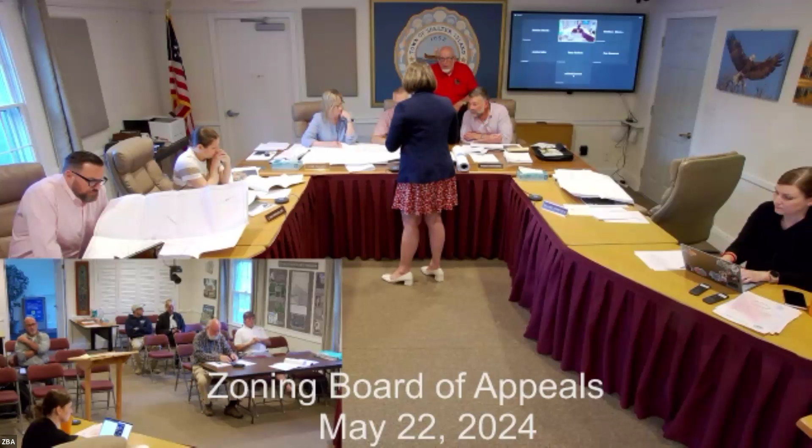There's nothing on the outside of the house right there, everything's outside of the building. So the only thing you're here for a variance from the ZBA, and a special permit I guess, is just this. None of the other things you want to do are in the setback at all. That's right. Everything else conforms to zoning and just requires a wetland permit, that's their thing. It doesn't need a dimensional setback relief from you.

We tried to limit the request for variances, we tried to avoid actually coming to the board. We thought we did, but we were in error because we thought this was a side yard. So we thought we were meeting the setback, but we found out we were incorrect. All right, thank you.

I'm sorry, can you just clarify again that shower, because I'm looking at all these plans, unless I'm looking at the wrong thing, please let me know. But the mudroom addition still shows a shower here. Can you clarify this for me? Is the mudroom addition going to have a shower in it?

State your name. My name's Kimberly, contractor on the job. The shower that's existing there is gone. There won't be any outdoor shower on that addition. The addition is extended to the corner of the existing building.

Okay, so these are not accurate then. I see it here, proposed mudroom with the shower here, and then it's also on this plan as well. No, that's gone, this continues to the end. There is no shower there.

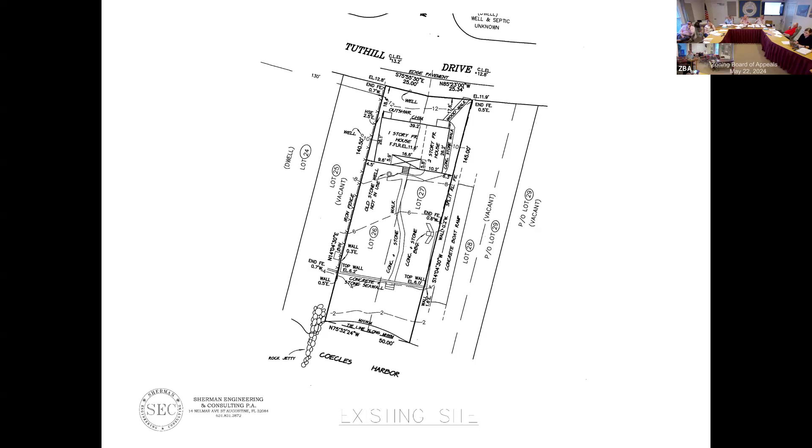The property is on Tuthill Drive to the north, Coecles Harbor to the south. This is the existing site, a 50-foot wide piece of property. It's in A zone, so you've got a 40-foot front yard setback and 25-foot side yard setbacks, meaning basically there's zero building envelope on this piece of property. I want to zoom in and point something out here: the flood zone on this property, where you go from a hazard zone, is along this AE10 line. Everything landward of that is outside of a hazard zone, and everything seaward of that is within it. So the existing and proposed buildings are not in a hazard zone.

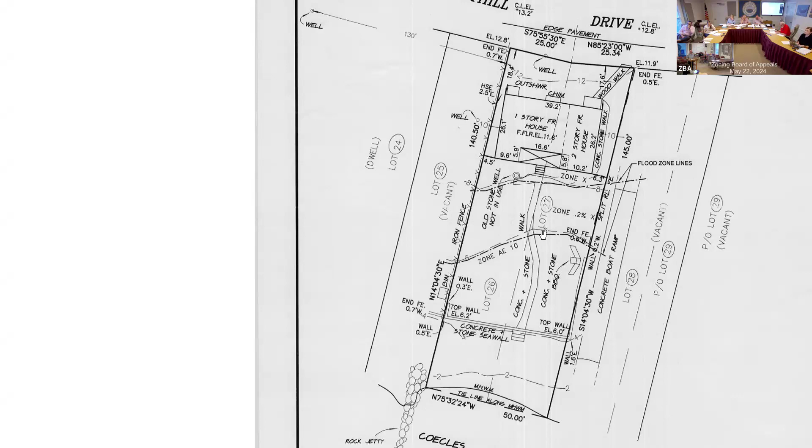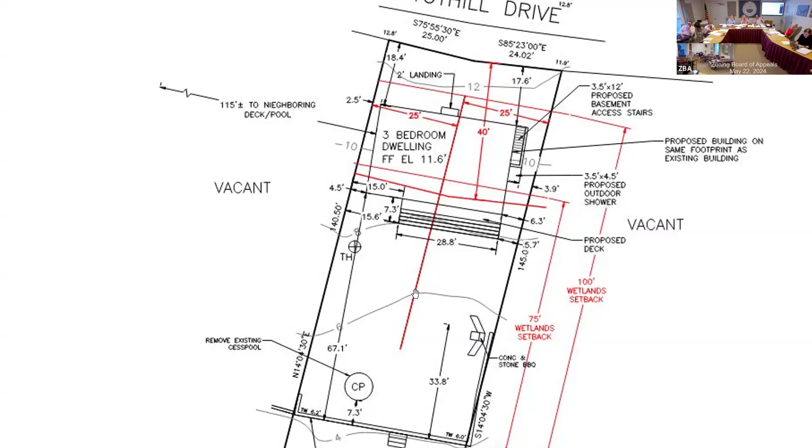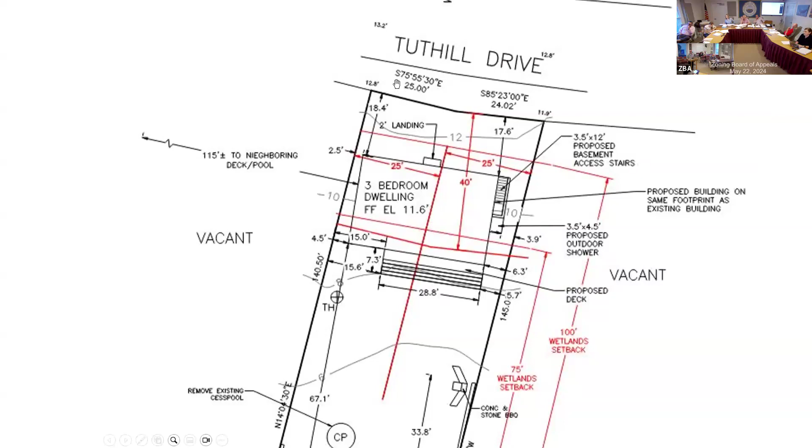This is the proposed footprint. The building itself is the same depth and width. As for setbacks, we've got wetland setbacks, both a 100-foot setback just landward of the house and a 75-foot setback that goes through near the waterside edge of the house. Our 40-foot front yard setback means the house is pretty much almost entirely within that setback, and this is the 25-foot setback from either sideline. So there's just no building envelope whatsoever on the property. The existing septic system is this cesspool, just over 7 feet from the on-site retaining wall or bulkhead, which is also the landward boundary of the wetlands for the property. The well that we just put in is up here in that north corner on Tuthill Drive. The well that was here previously was slightly to the right of that, and a little to the north, slightly off the property.

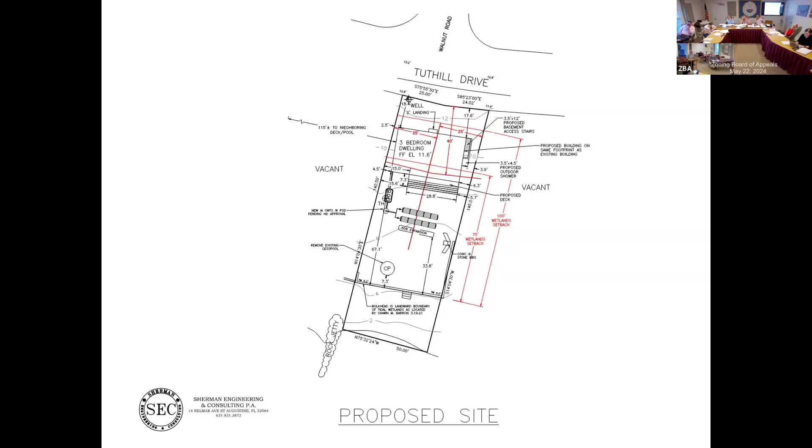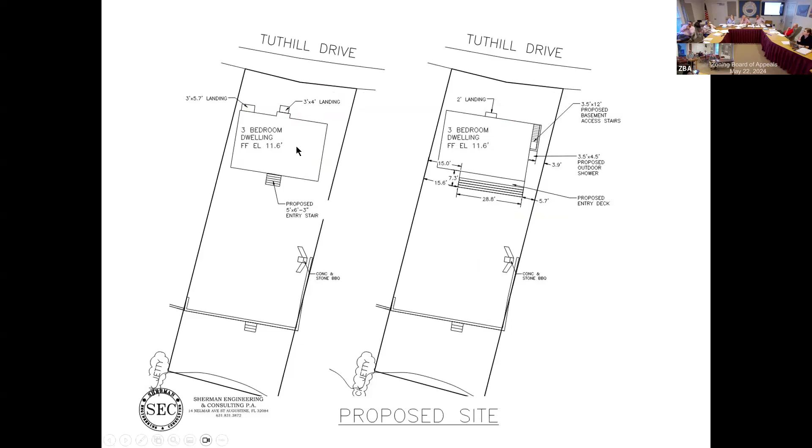So on the approved plan, we basically just mimicked the existing footprint.

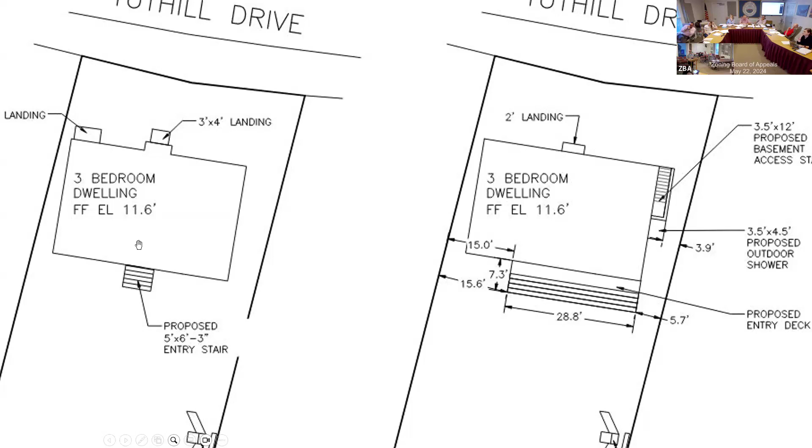What we're asking for is a slight modification: getting rid of the landing that was the converted outdoor shower, getting rid of the punch out in the front of the house and just making a landing there, putting in an entry stair into the basement along the right-hand side of the building, and then a small outdoor shower adjacent to that entry stair.

The entry stair doesn't need a ZBA variance because it's less than 5 feet wide, so it's ingress and egress into the house, so it complies. It doesn't have to comply with side yard setbacks.

The other main difference is the entry stair along the water side of the building. So we've gone from a 5'x6' entry stair that was approved here to one that's wider and deeper because of a set of sliding glass doors that take advantage of the view and the opening out to the rear of the property, to the water side of the property.

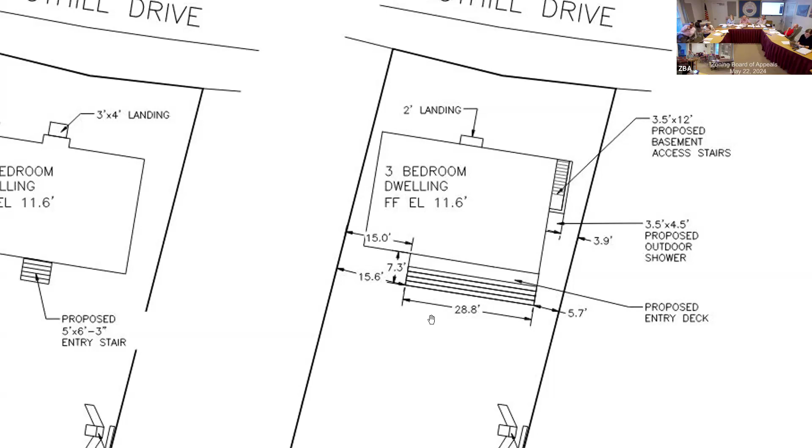So here's our elevations, and this is really where the bulk of the project is, obviously. So what was approved is on the left-hand side, what's proposed again on the right. The ridge elevation is the same at 44.6, which is just under 35 feet above average existing grade.

It does get higher for the length of the building, where right now that middle third is that higher ridge. Now the higher ridge runs the length of the building.

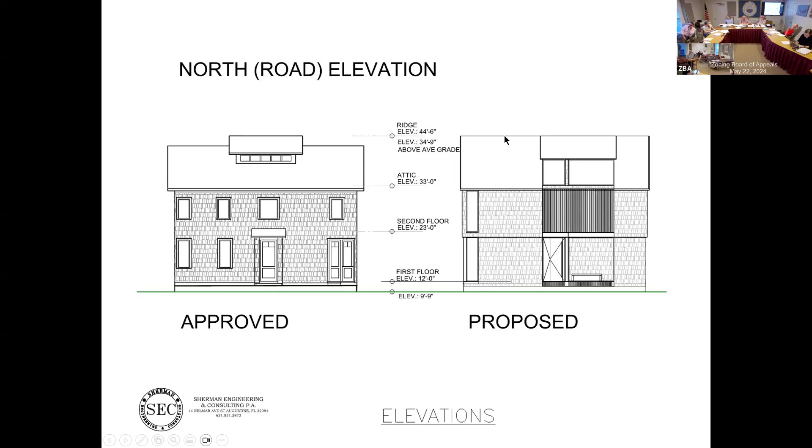That's the side elevation. So if you were standing looking at the property from this vantage point, to the left-hand side would be Coecles Harbor, to the right-hand side would be Tuthill Drive.

What's the height to that deck, Matt? To this upper deck, 33 feet is the height itself. Our average existing grade is 9, so you're at 24 and a half, give or take, to this deck here on both vantage points. And maximum height for a flat roof here is 25.

So even that would comply if it were a flat roof. With this heightened ridge elevation, are you doing anything on the interior with it as well?

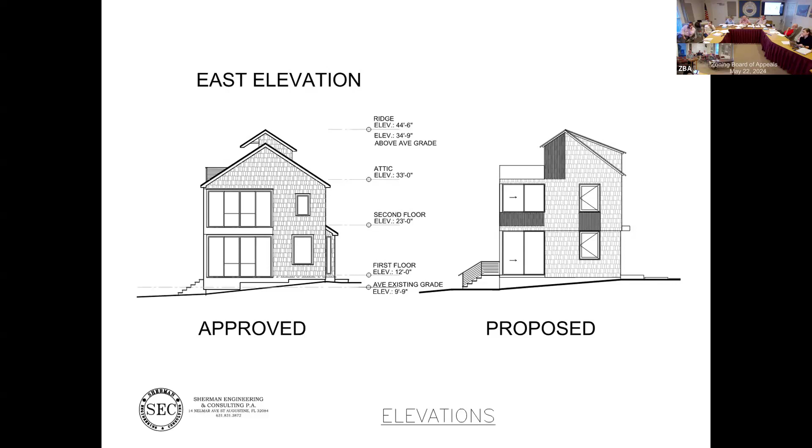Yeah, and I'll show you. Okay, so this is just looking from the opposite direction. This is on the water side, looking at the building.

So originally we had the roof deck in this area with a couple of French sliding doors, and then the area behind for the stairs and for mechanical equipment and storage. It's basically translated into this, so slightly a slicker view, a more simplistic view.

On the second floor, you've got sliding windows, very similar to what was originally approved. And then on the first floor, this is where the stairs end up being modified. We had a pair of sliders in the middle of the building that had that one stairway going out. Now we've got 3 sliding panels, which have the stairway in front of them going out. So that's what necessitates that wider landing coming up into the building.

Can you go back there? Yes, absolutely.

Did you have any? No, I just wanted to look again. Okay.

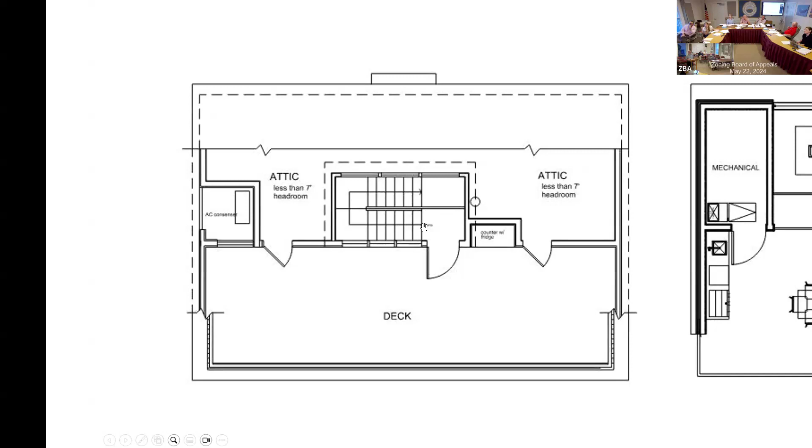So let me ask — before, because the ridge was only high in the center, that was really the only place where you'd have enough clearance to eventually finish the space. Now, how much headroom do you have here? Let me back up.

In the new design, right before, it was less than 7 feet? Yeah, so at that section on the water side, you don't really have any. On the road side, you'll have 7.5 to 8 feet of headroom in this area, right here by the stairs, and then obviously a little bit more than 8 feet as you go toward the middle of the building. So let's look at that.

So in this area, it comes up to 8 or 9 feet, but as soon as you come into the staircase, it's pitching down. So you've got significantly less as you're coming to the outside of this area here.

Okay, what about in those two rooms there, the two rooms that are mechanical? Yeah, the ridge line comes right through the middle here. Right, and then it starts pitching back. So you've got — and I can toss to Michael here in just a second, he can probably clarify this a little better than I am — but you've got probably a 9-foot headroom as you're at this wall, and then it's pitching down toward significantly less than that.

Let's go back to the section. So you're pitching down to probably a 5 or 6 foot headroom on that outside wall. I definitely want to get that number if we can.

Yeah, we'll get that. And Michael Lamont, who's on Zoom — Michael, do you want to chime in at this point? If you've got those numbers handy for both the interior ceiling height at the exterior wall, I mean at the middle wall, and the interior ceiling height at the interior wall.

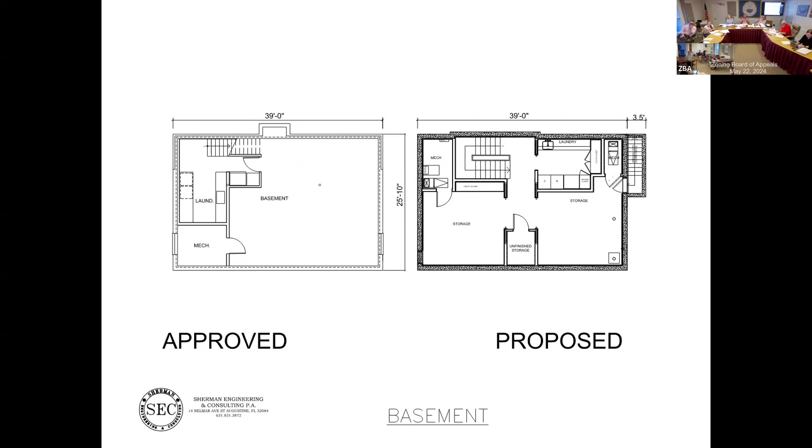Michael, I'm tossing to you. You look... I think he's not picking up on me. All right, so I'll move on—you get on, please, or Bo, one of you, please, so we can figure this out. Can you hear me? Okay, hi, can you hear me? Bo? Can you go up to the roof deck, Matt? Hold on, let's... oh, sorry.

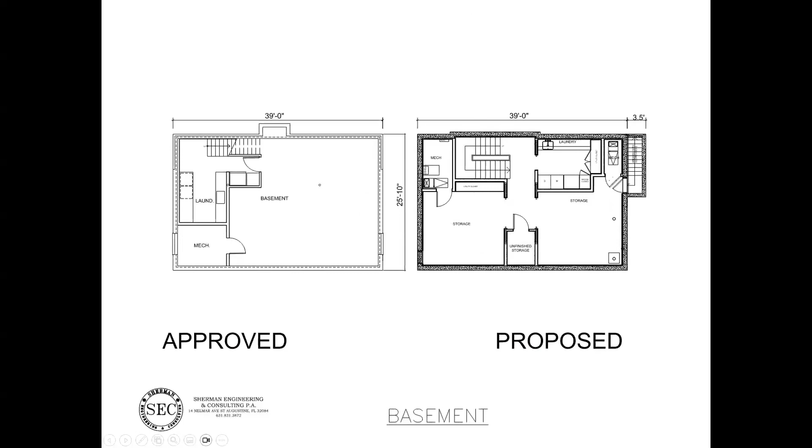Go up to the roof plan, Matt, I can speak on those heights. So at the mechanical room, that door is 8 feet—right here, let's go here. At the mechanical street-side wall, that knee wall is only 3 feet, and then it goes up to 8 feet at the ridge. And then in the stairwell, it goes from 8 to 6.

So the mechanical storage space, there's really not headroom at all to make it a livable space or functional space. It's more just to throw in cushions or things from the outside deck.

So Matt, it's labeled mechanical—what is the plan? Is it actually cushion storage, or are you putting AC units up there? What's going on? Bo, that would hold the air handlers to feed the floor below. So we'd have one air handler—we're still working with the mechanical engineer to determine if we need one in each of those spaces. We'd probably just need one to feed the entire floor. But there would be a mechanical unit in there, and then storage for the cushions and things when not being used.

It just seems like a lot of space for an air handler. Right.

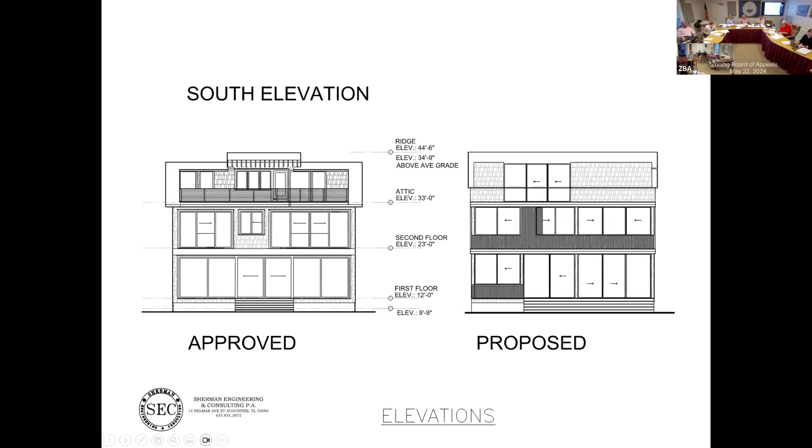Let's see here, go back to the site plan so I can check. Must be in the same footprint—it's the exact same footprint as what's there now, yeah. So the closest point to the road is 17 and a half. Yeah, and then on the far side it kind of pitches away from the road a little bit, so it's 18.4 on the far side.

I'm very curious to know what the existing ridge—like, what the difference in that feeling is gonna be as you're driving down Tuthill Drive.

If it's just a little bit, it's not a big thing. If it's a lot, it's different. I can get that, because we had gone over that at the previous hearing, the previous approval. I've got it, I didn't think to bring it with me tonight, so I'll bring that to you guys.

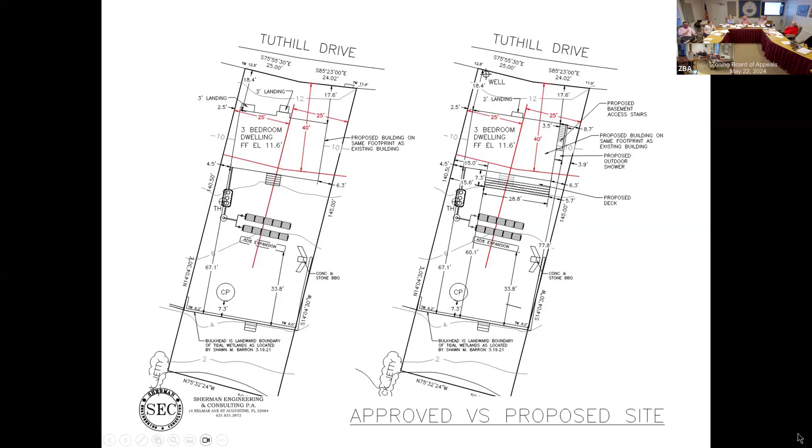Can I just ask one question? Could you go back to the picture of the deck up top, the third floor we were on? So it is an outdoor deck. Bigger now than before, because I have notes from the October meeting of '21. That was 30 by 11 originally? And now what is the outdoor deck?

It's about the same, maybe another 2 feet deeper, which takes away from the would-be mechanical space on the inside of the house. It creeps in a little bit more. And on the other main difference, that area where the roof line is larger was just over top of the staircase, whereas now that roof area extends out to the outer walls.

Is there a reason for that? The aesthetics of the design, trying to make it look more uniform. I'll toss that to Michael and Bo, but the idea of having the design fit with the aesthetic, that's the primary driver.

And there's also practical reasons as well. Bo, if you'd like to chime in on that. The doors out to the deck before were only 7 feet, so this gets a little bit more head height, which is still within the max allowable building height for the project.

Right, I mean, it's the allowable building height if you're not in the setback. Right, yeah, in the end. Okay.

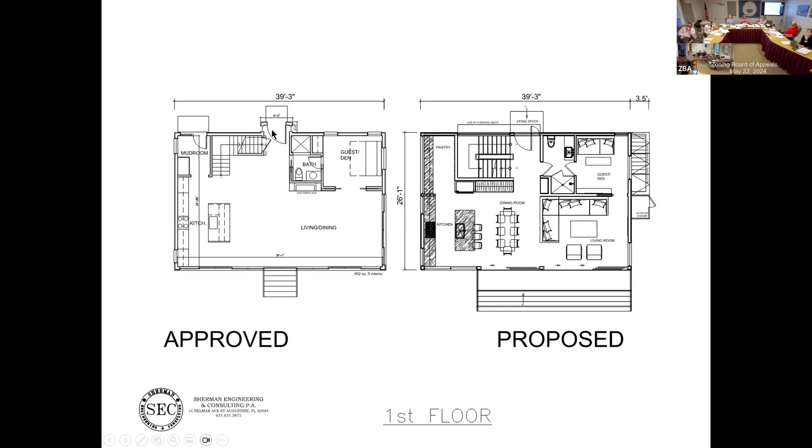There's a little bit of a punch out on the front of the house, this area, let's see. It's this area here, I don't know how well you can see that on the screen. It comes out a little bit. This is the area you're talking about, I think. Right, and so this area comes out. Let me see if I got a better view. You can't really see it with these pictures.

I was hoping you could see the chimney. You can't really see it. But that area along the front of the building comes out just to make it a straight wall going across.

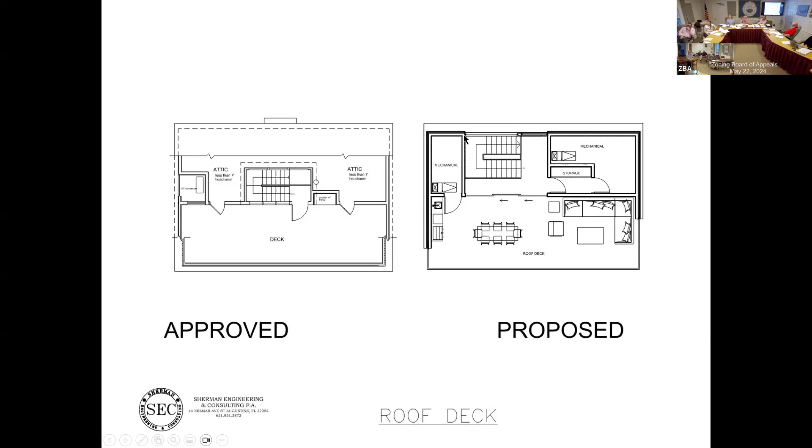If you see on the elevation, it's basically a small overhang, 12 inches, to get a little bit of rain cover as you're walking in to the door and protect the water from going into the house. So it's just the overhang. There's no actual bump out in the wall? Correct. Okay.

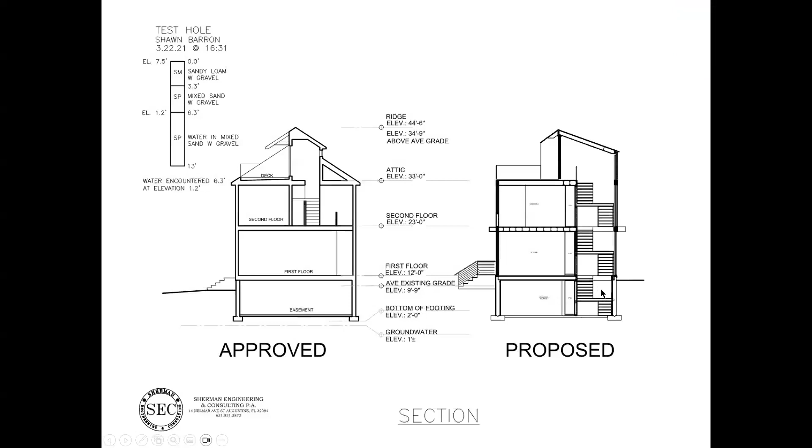Photos, just to kind of give you a feel for what's there now. And Bo, do you have the information on the existing height? I don't have any of the existing building information. So I'll get that to you so you can see what we're talking about as far as before and after. That has to be submitted by June 5th if we're closed this tonight.

Matt, do you have a line drawing, like in the past, that's superimposed on the existing to see the actual bulk of what this is? I don't, but I'll see if I've got it from the first go round. I was more focused on the original approval, changes from the original approval. I can look back too. No, but this is substantially different, honestly, from the original.

Can you do renditions of what it would be, the view from the street between the two? Not artistic ones, just something that would really give a realistic feel, like a line drawing. I'll see if we can do so. What about Bo? Yeah, that might be, we would be able to provide something with a little bit more context instead of just line drawings.

Again, we need that by June 5th if we close this. If you're going to wait for that, I think you should keep it hold it open and have them come in so you can discuss it. I'd also like to see what your solution is to this mechanical room height issue. There's a big difference between a space labeled an attic from what we originally approved versus this, so if there's any way you can rework it, it'd be interesting to take a look. Yeah, because originally you only had a door open to the deck, now you've got sliding doors, especially if that's all sheet rock.